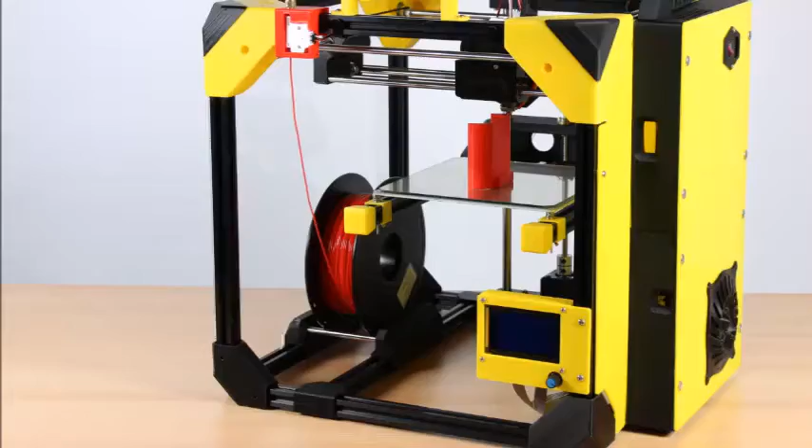Now that Cura is all set up, both with the Mason and with Mason material profiles, we want to just kind of walk through the different settings within Cura and how they affect the printing of the part, and key settings that you might want to look for, and general operation of Cura just in general.

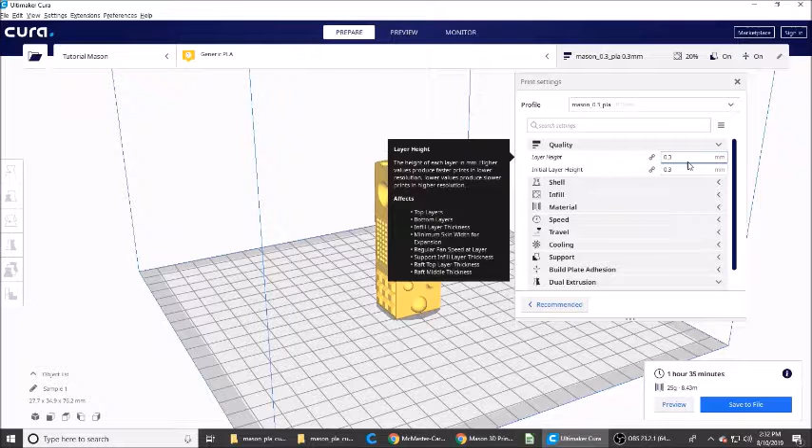The first tab we have is quality, and quality is just the layer height. And there's two settings in here that are primary, the layer height itself, which are how big of layers or chunks, what resolution this part is printed in. The highest that the Mason can go through with a standard 0.4 nozzle is 0.3 millimeters. So these are for fast functional prints that don't need a lot of detail.

The initial layer height is 0.3. That is what the very first layer will be. That's generally useful for making sure that the first layer adheres well and just goes down successfully, because smaller layer heights can tend to not stick to the bed or not gain enough adhesion to last the entire print.

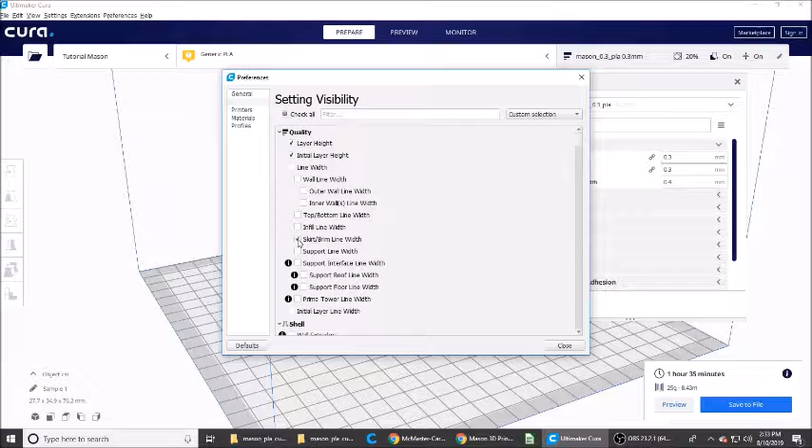In order to add other settings to Cura, basically expand this menu, if there's some feature that you as an expert user need, all you have to do is click on this gear and it will open up more settings that you can then add to Cura. For example, in the quality tab here that we're looking at, you can also change line width or skirt and brim width. Just by checking these boxes, you now add that feature to that menu, and by unchecking it, it disappears. So check it, shows up, and unchecking it, it disappears.

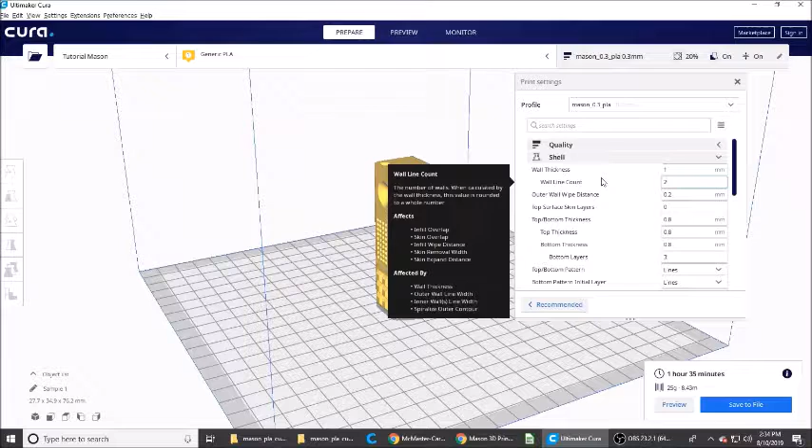But in general, you don't have to dig too deep into this unless you have something very specific that you need to have occur with your part. So that's quality. Going into shell, you have the wall thickness, which is a standard capability. Generally, increasing wall thickness increases the strength of the overall part, as well as increasing infill, but we'll get to that later. But wall thickness is generally set at 1 millimeter, or basically 2 line counts.

And then you have the bottom and top thickness, which top and bottom, fairly self-explanatory there. And then again, other settings that you can activate or deactivate in order to create different performances. One that is very commonly needed and used is the Z-seam alignment. This has 4 different areas, and of course, with all of these, you actually have helper text that pops up when you highlight one of these characteristics that kind of explains what it does to the model.

But with Z-seam alignment, you can do user specified, whereby you define the start point of each circumference of a layer based on some XYZ coordinate on the bed. And then you've also got shortest for faster prints, random in order to try to hide the Z-seam, and then sharpest corner, which is another method of sort of hiding the Z-seam and keeping it contained. But those are all those settings. The shell is basically for surface finish.

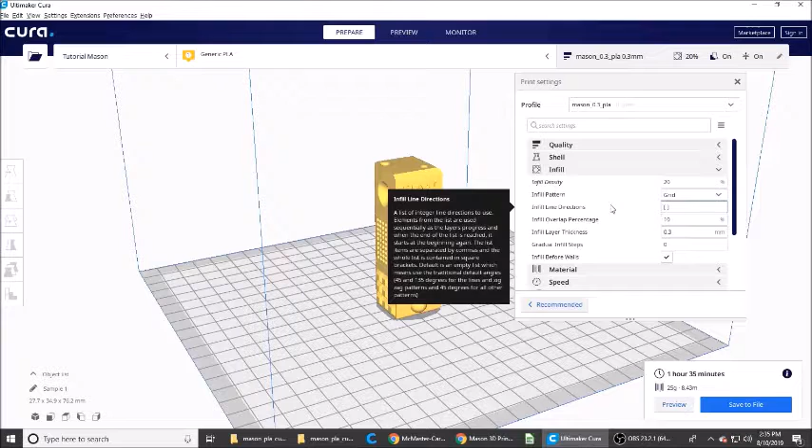And then infill, again, increasing the infill density can increase strength, or change the properties of the part itself to more flexible or different kind of part dynamics. Infill density 20 is generally common. Going above 35 is getting very dense and will increase your print time significantly, and going lower can lead to gaps in the top surface.

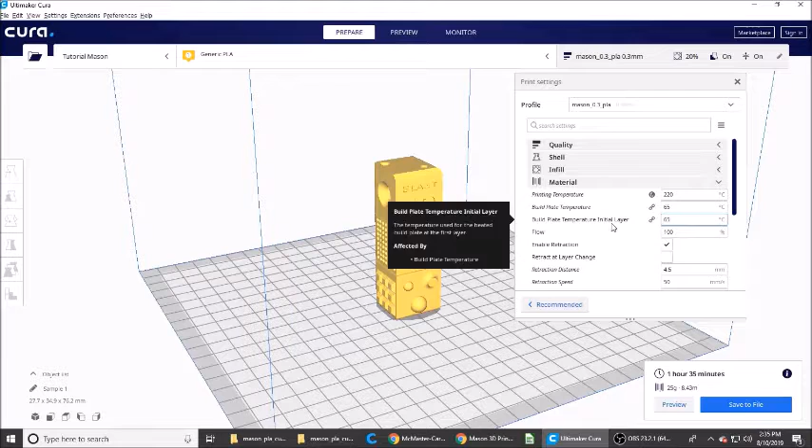Materials, basically just print settings and print temperatures and retraction settings. So in this case, PLA, the temperature is at 220. If you have some material that is not within the general Mason print material profiles, you can look at that material's properties and instructions and adjust these properties accordingly.

Generally, with the Mason, a retraction distance of 4.5 is nearly universal for all materials. You may have to tune it a little bit, again, if the flow properties of your material are different. Same goes for the retraction speed. These are generally constants across all materials, but if you have a very specific brand of, say, PETG, then these may need adjusted.

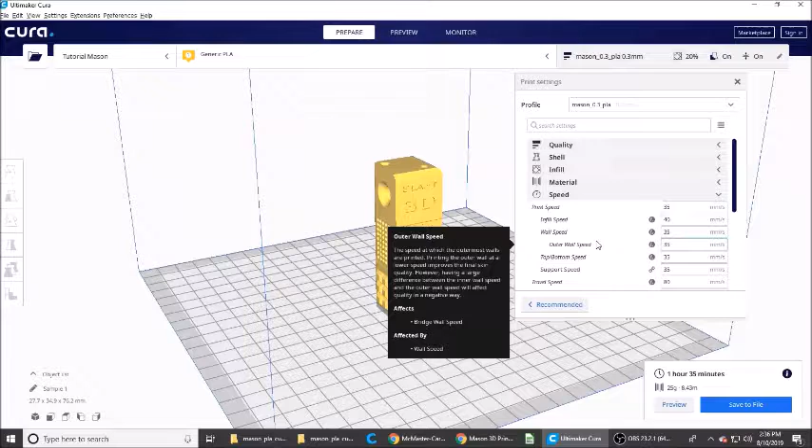The next tab, speed. Speed, how fast do you want this print to be created? Faster speeds create more defects in the surface quality of the part, but you have a faster print time, so that's generally reserved for simple functional parts, whereas slower speeds are for very fine detail. The default speed for the Mason is 35 millimeters per second.

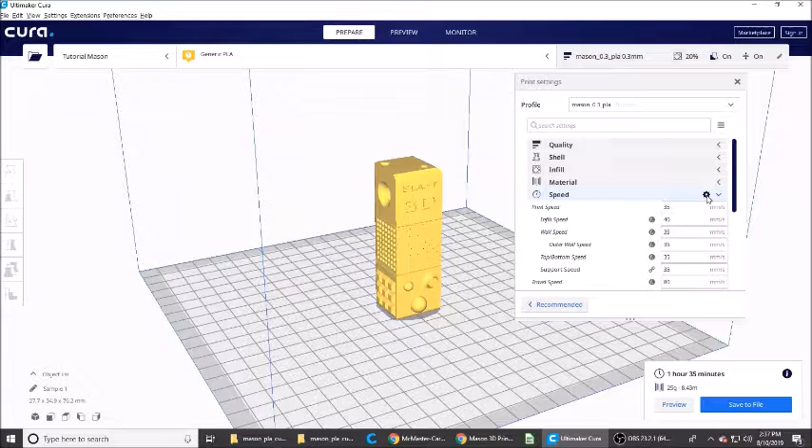This is a standard speed that is a good combination of quality and effective printing time. This model right here, which is about 3 inches tall and 25 grams, is currently estimated at about 1.5 hours. But infill speed, wall speed, by going through all these other settings that again can be accessed through this gear, they can optimize the overall print time.

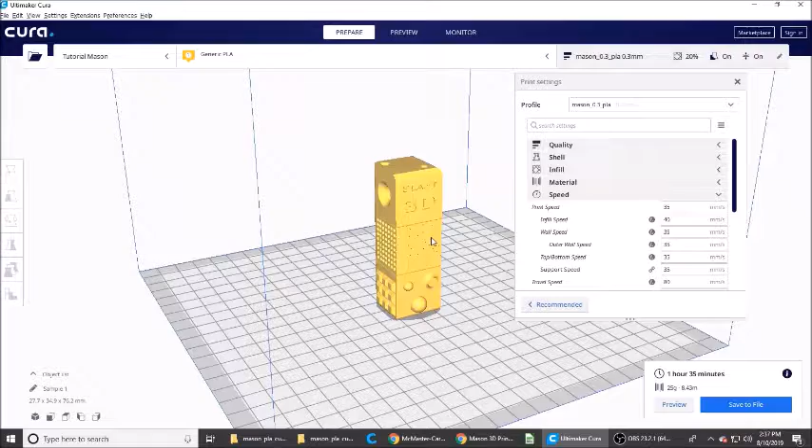So if you are optimizing a part for production to be exported to the Slant 3D farm and you're trying to minimize cost, that's when these settings would become valuable, because the infill could be printed very quickly, whereas the outer surface may need a much slower speed in order to refine small details like, say, these patterns on this part.

So after speed, we have travel. Nothing here really ever needs changed. It changes the dynamics of how your nozzle moves from one point to the next when it's not actually printing.

So combing mode actually is a feature that allows the nozzle to stay within the part as opposed to crossing over openings, so that if the nozzle was, say, on this side of the hole and for some reason it needed to jump to the other side of the hole, with combing enabled, it would actually move around the hole, so there's no chance of having stringing through the hole. But again, these settings very rarely need to be modified.

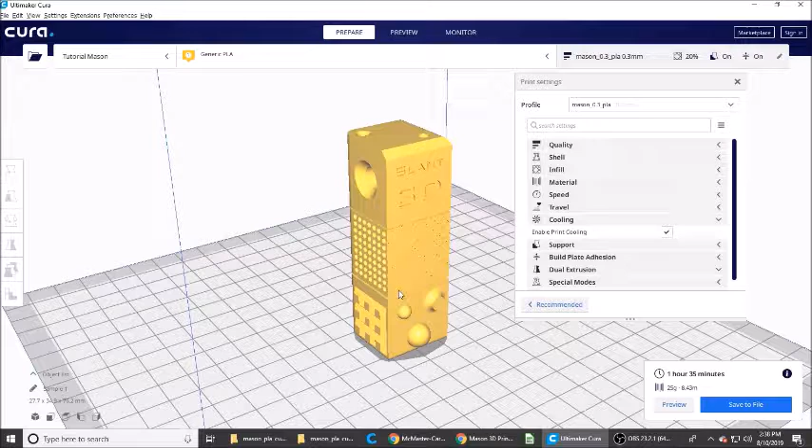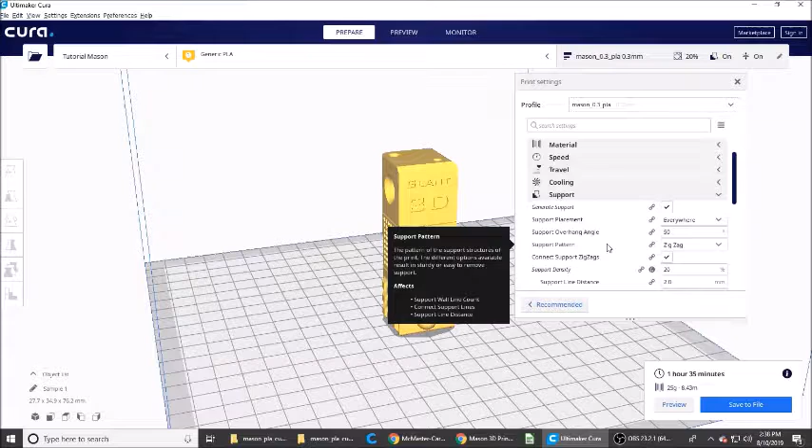Cooling itself, whether the fan is turned on and when that fan is turned on. If you're doing anything with overhangs, the fan always needs to be turned on. If you're doing a very simple enclosed part, or in fact even this part, cooling isn't terribly necessary because there's no overhangs or any sort of features that could sag because cooling isn't present. But again, that's very specific to your part, and in general you want cooling turned on as it is right now.

Support. We'll do an entire video on support engineering, but again, here you pretty much want to remain with the defaults for the material profile provided for the Mason. It defines how the support should be generated, where it should go, what kind of overhangs require it, and this is really a discipline in and of itself, so we're not going to go very deep into it.

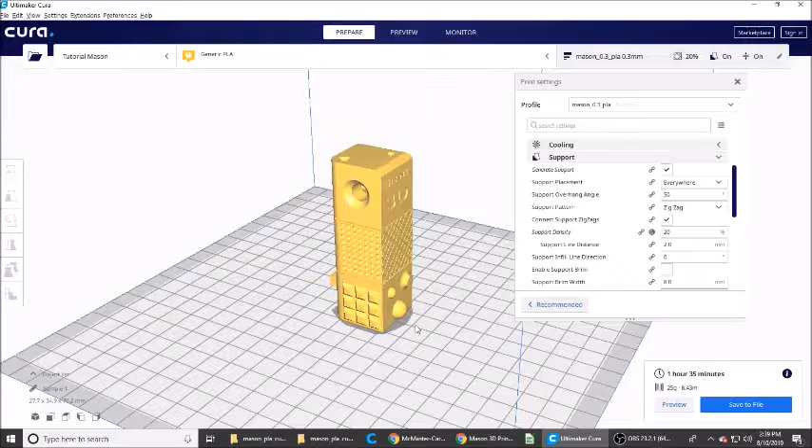But if you're not familiar, support is removable material that is printed up underneath areas that are overhangs. So for example, these small squares that come out of the side of the sample part, support would be built up underneath this cube so that it wouldn't sag when the nozzle tries to print the very first bottom part of it. So supports are that kind of a resource.

All right, build plate adhesion: you have rafts, you have brims, and then you have skirts. A skirt is basically a priming trail around the outer edge. A brim is a collar basically put onto the bottom of the part that increases the build plate adhesion surface area. And then the raft is something that is built onto the build plate, and then the part is built on top of that raft.

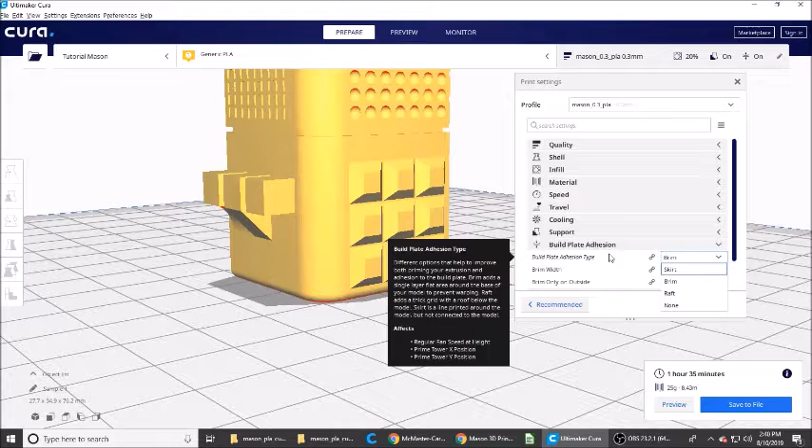Generally, the raft is only used if you're trying to maintain exact dimensions on the bottom of the part. The skirt is used if you have a very simple functional part and you just need some bed adhesion, but generally, if possible, you want to design your part so that none of these are necessary. But again, within the Mason defaults, the brim is the one that is used because it's the most commonly required for any sort of part, and it's a good general purpose thing to add to ensure a successful print.

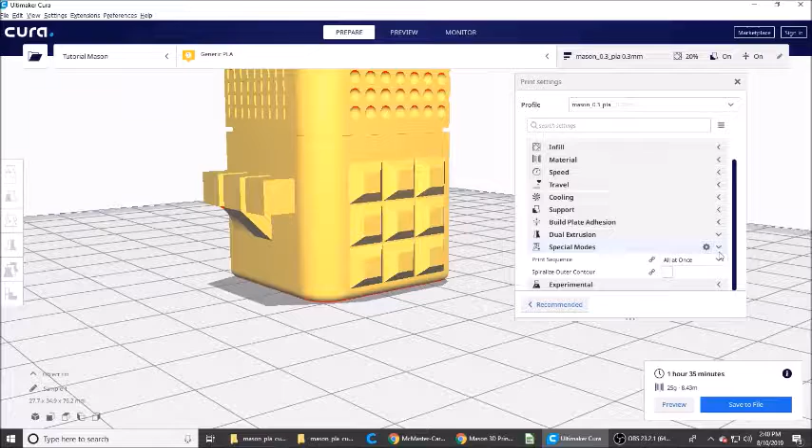Dual extrusion isn't necessary with the Mason because it's a single extruder machine. Special modes, print sequence all at once or spiralize outer contour. Very few people will ever need these modes, and generally they are not necessary. If you're working with your Slant 3D engineer, they will be able to help you define how this should be printed in order to scale it up in production. In general, try to print one part per bed, and that's the optimum way to set up a piece for production.

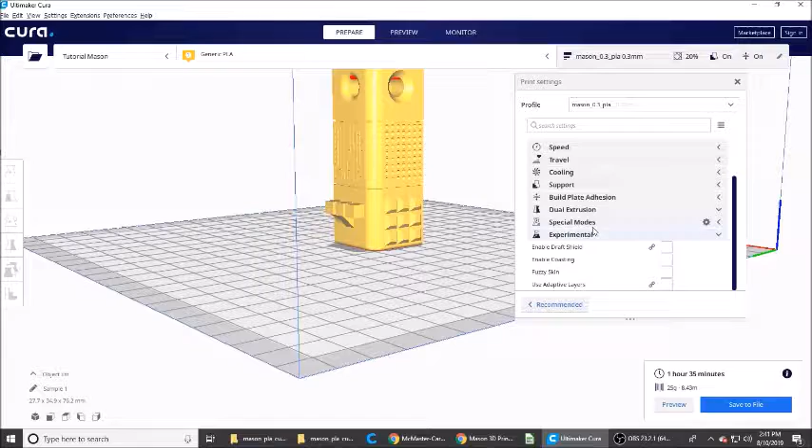Experimental settings. These are settings that are still in beta, but can create some nice features, so we're not really going to talk about those. If you want to explore them, or if you're familiar with Cura, they are good resources for very specific part characteristics. All right, so that is our walkthrough through Cura.